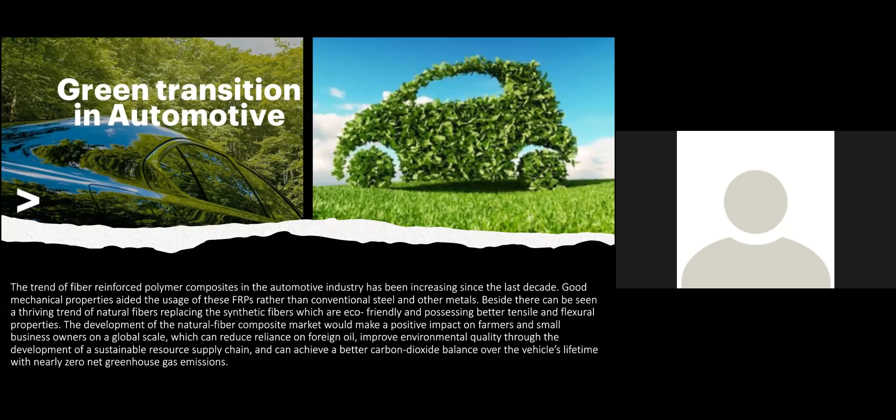You talk about green sustainability transition in automotive. Actually, natural fiber composite cannot be recycled - it's a plastic material mixed with natural fiber. This material cannot be fully recycled compared to steel or aluminium, because you recycle steel and aluminium and get back steel and aluminium. But you cannot recycle this natural fiber composite, and it also cannot be degraded. So how do you ensure that this composite is actually green?

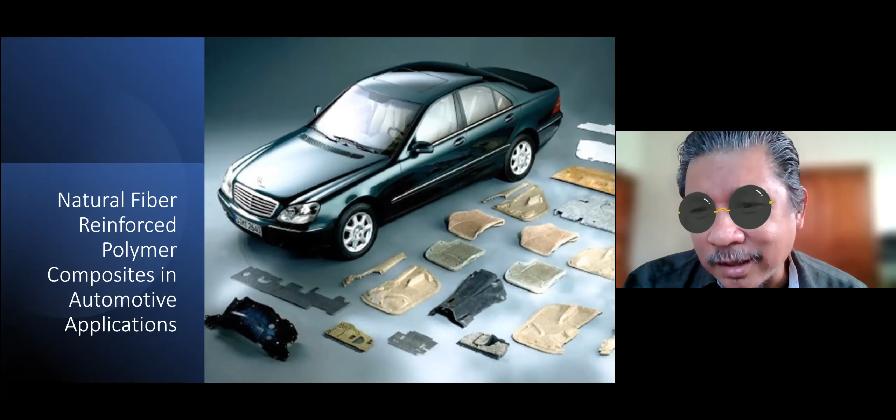I guess you can take it to the recycling center to make toilet paper. Sorry, just a remark. Okay, tak apa, continue. Yeah, so the study also claims that this is good for...

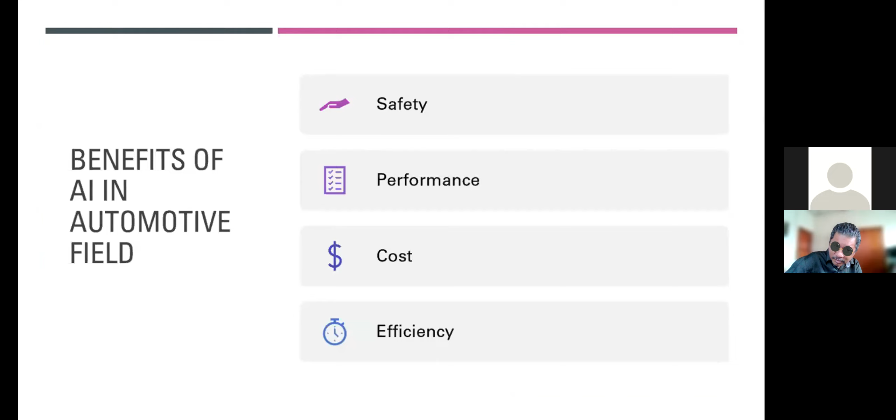Okay, for safety, by using AI in the automotive field or the car itself, the car will analyze data from the database. It will check the driver's behavior and then try to actively avoid accidents.

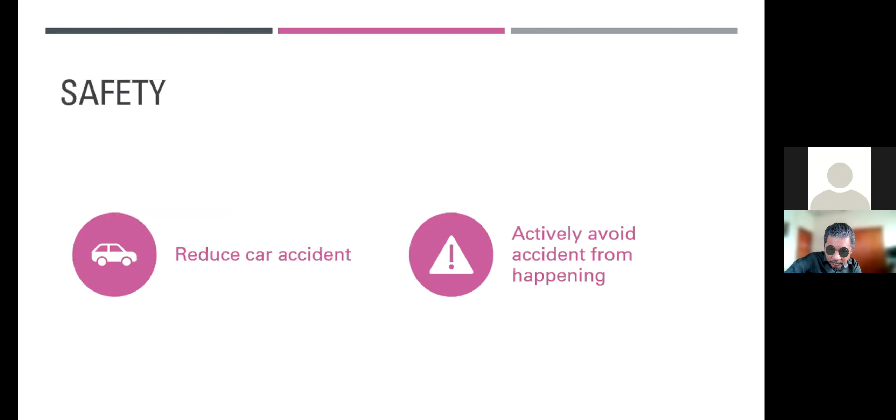So Taiwan is leading. Taiwan is one of the biggest players in electrification of motorcycles. They have a company called Gogoro, one of the pioneers in this market. They have developed a whole system of battery swapping in the region, with stations where batteries can be charged, taken out, and replaced.

There are 370,000 riders in Taiwan using Gogoro's network, 175 million battery swaps a year, 265,000 a day. That's a significant amount of batteries being exchanged across 2,000 Gogoro stations around Taiwan.

Now, this is a good study showing the usability and day-to-day usage of battery swapping technology in everyday life. It's practical, easy, and it seems to work, and we could totally adopt something like this. Now, it's growing fast.

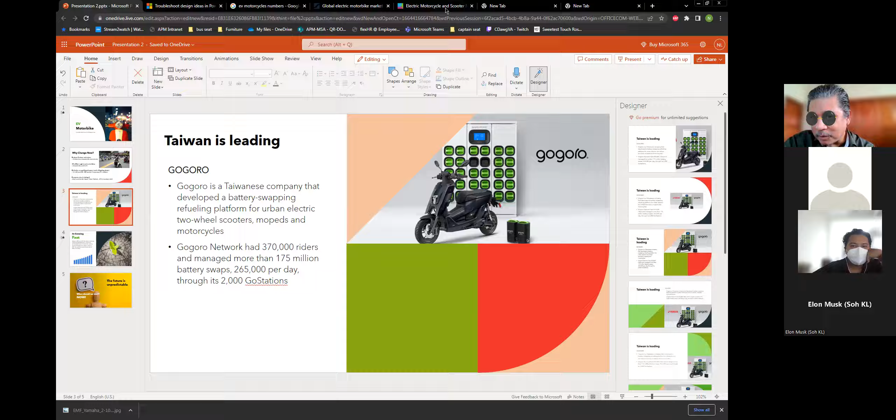So who has not presented? I think we have one more. Do we have another presenter here, or has everybody presented? Kelly, will you be presenting, Kelly? Yeah, I will present now. Okay, I think you are the last one to present. Can I close all the rooms and get you to present in front of everyone? Oh, okay, okay.

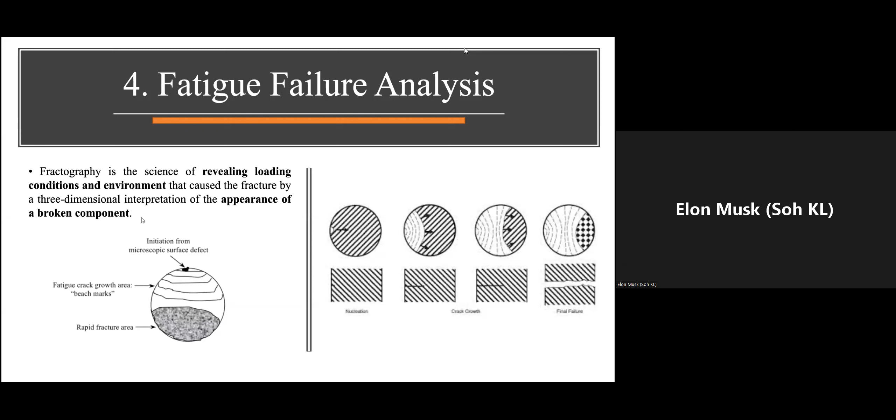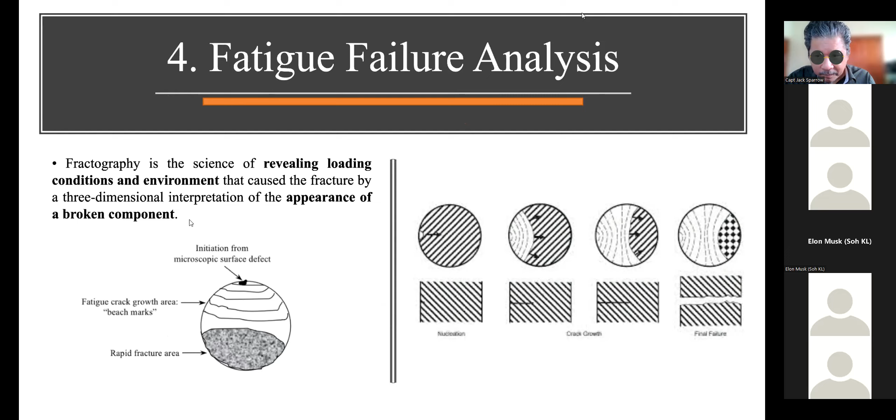There's one method that we use commonly, which is fractography. Fractography is the science of revealing the loading condition and environment that cause the fractures, by a three-dimensional interpretation of the appearance of a broken component, which enables us to read something by looking at the fracture surface, the broken surface of the broken materials.

Because whatever happens on the material, it will leave marks. Different types of loading and different types of stress will cause different types of marks, as you can see on the right hand side, starting with the nucleation.

You will have a small void. As the crack grows, you can see there will be a wave front-like structure mark, propagating from the nucleation spot, the initial spot, towards the opposite end.

As the crack grows, until the point where the connected surface is so small it can no longer withstand the stresses, it will have immediate fracture, which is figure number 4. You can see the diamond shape is the immediate fracture, where it happens within a split second, and the whole material will be broken into two.

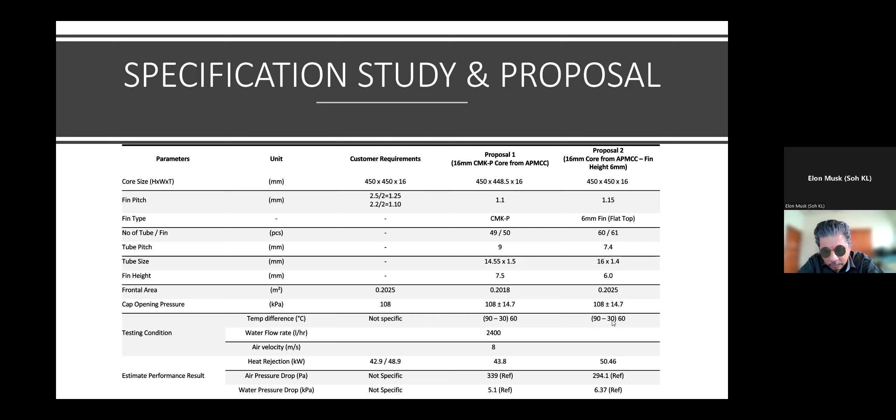Okay, this is a performance study for proposal 1. So for proposal 1, the heat rejection is 43.8 kilowatts compared to customer requirement of 42.9. This is the estimated performance on different water flow rates.

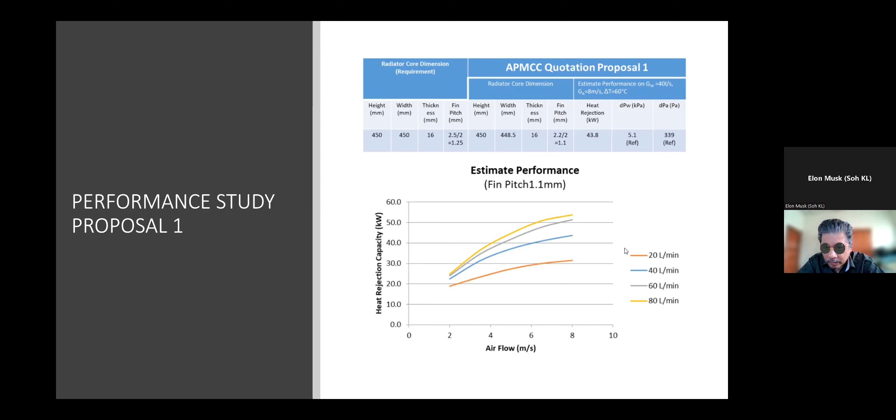And this one is proposal 2 for design number 2, which can produce 50.46 at 40 liters per minute, also 60 liters per minute of flow rate.

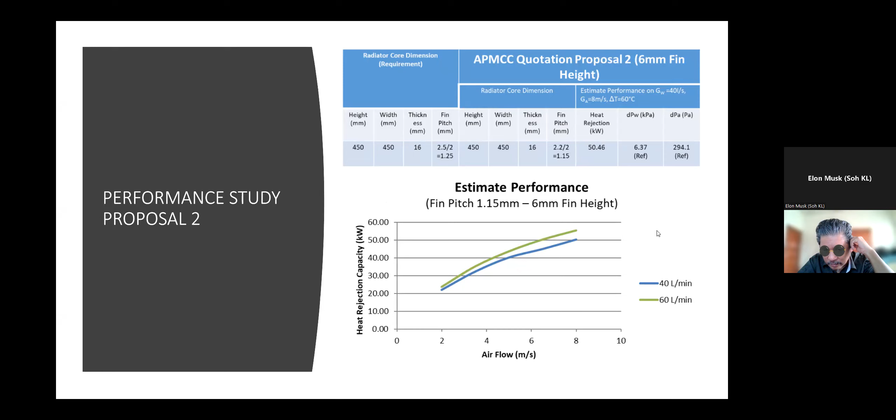Okay, for this radiator proposal for number 1 and number 2, this is a tooling and jig needed to be developed for this project. First one is a tank mold. Second one is the header plate and PRC die, seal pack mold, auxiliary and core jig.

Also, we need some machine modification since we are going to use our 6 mm fin height. So our existing 7.5 mm fin height will need to be modified to 6 mm. And also we are going to develop our new inspection jig. Okay, that's all for this proposal. Therefore, I hope you will consider this proposal to be accepted and approved by your side. Okay, very good.

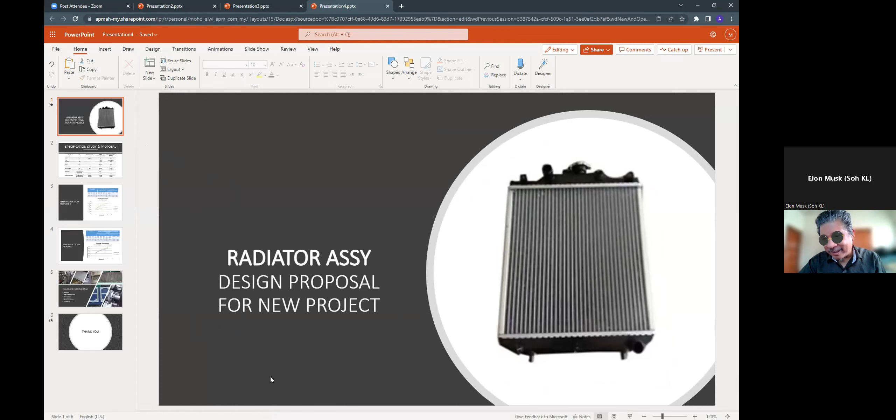Did you mention what problem your proposal is solving at the beginning of your presentation? I stated the customer requirement. Customer requirement, yeah. We don't have a radiator assembly that meets the customer requirement.

So therefore, we have designed, therefore the need for us to design a radiator assembly that meets this requirement. Okay, very good. So proceed, continue with the next one. Okay, thank you, well done.

The concept. So this is how the industrial design team in APM does our design work in general. That's about it, thank you.

It looks like an airline seat. Is it comfortable? Better be, better be. Hey Didi, what problem does your solution solve?

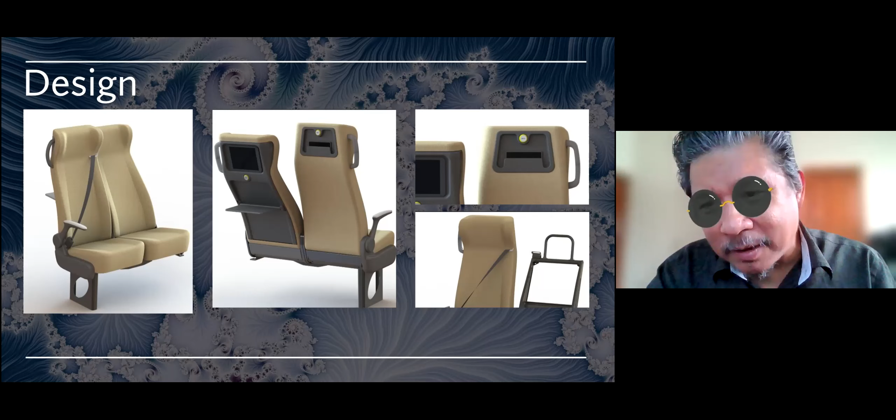Did you identify the problem at the beginning of your presentation, Didi? Oh, so what I'm doing for my presentation today is not to show a product. This is a general showcase of how the design process works in this company.

Design process. Yeah, we showed the general design process in APM, how we start from A to Z basically. Maybe at the end of it, therefore, I hope all of you will use this process when you design items for vehicles, yeah? This ideation process has proven to be superior.

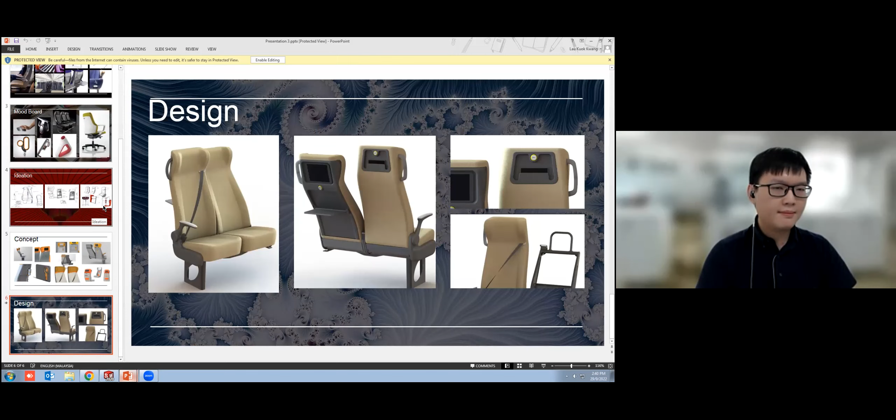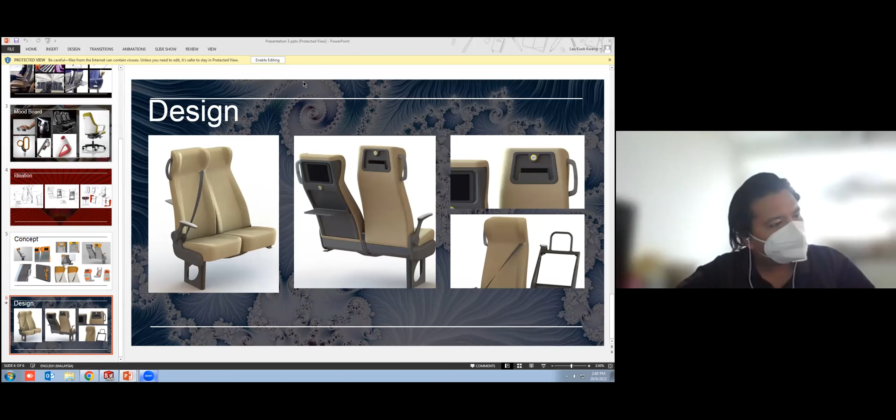Okay, Didi, well done. Next please. Okay, I'll stop this. Next please. John Wick. Okay, I'll come back to you.

Child seat, yeah. So this I'd like to promote too, Captain, child seat. It's a product by APM. We have 2 versions of color, blue and pink. So you can see this product. I didn't know that APM produces child seats.

Yes, where's the outlet, Captain? How do you sell it? Which channel? You just text me, then I get a product for you anytime, anywhere. It's only 288 ringgit, very cheap, you cannot find this so cheap a product in the market. 288 ringgit, and it has ISOFIX, yeah. You have all these features available. Wow, okay, you might be thinking about this. I will take up your offer soon. This is recording, this is recording. Then you can share to your friend, lovely wife, and so on. Well, I like it because it includes ISOFIX, so very good. Okay, well done, all right.

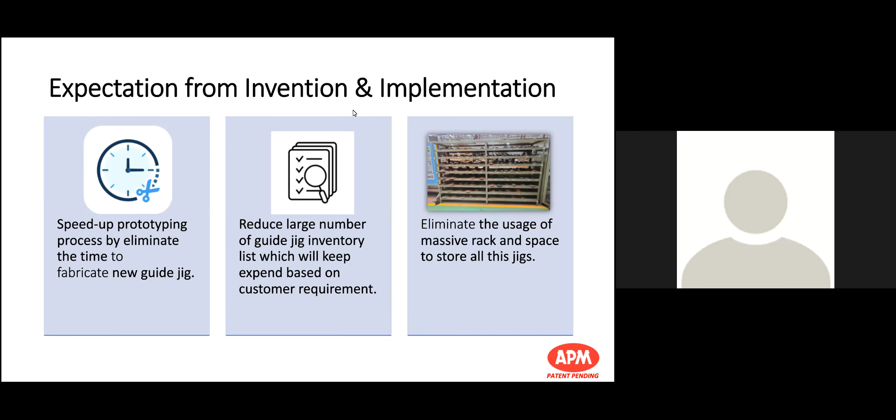And then we also can reduce a large number of guide jig inventory list, which keeps expanding from time to time. As you can see in this picture, the usage of the massive rack, so we can eliminate this kind of method and save a lot of space to store all the conventional jigs. So I strongly recommend and I'm confident that we can meet all these expectations if we proceed with this invention and implement it in our prototype, first print prototype process.

That's all from me, thank you. Okay, thank you Eliud, can you go to your final slide? This one, yes.

So for the first two items, speeding up prototyping and reducing large numbers of guide jigs, you have used vector drawing or line drawing. However, in the third item, eliminating the usage of massive rack and space, you are using real photos. If you use line drawing, keep it consistent. If you use real photos, make sure you use real photos for all the icons. I agree with that, it would look better that way.

Okay Eliud, well done, thank you. Impressive as always, well done. Has everyone finished in this room?

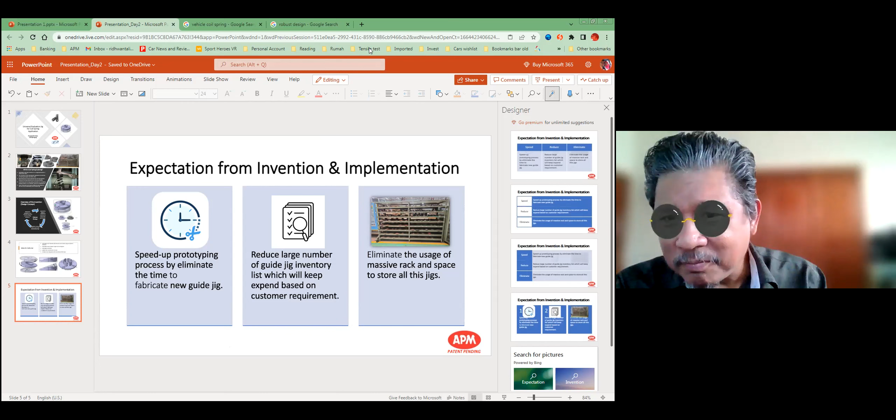Has everyone finished presenting in this room? Yes.

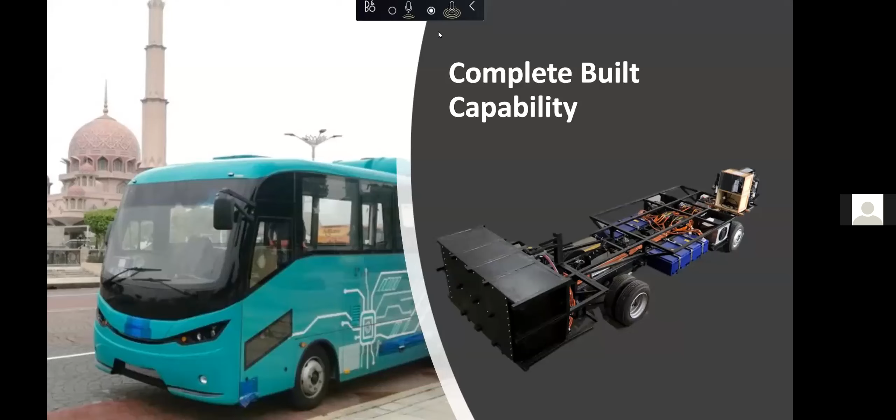So, oh, Master Po is presenting. Continue. Yes I am. So other than complete capability on conceptual design, we are also capable of constructing the full chassis as well as the full body electric bus.

We are also capable in technology development. For example, the heart of the system would be the battery pack. We can assemble the whole battery pack ourselves. We have a lab that is able to assemble and also test the complete battery pack.

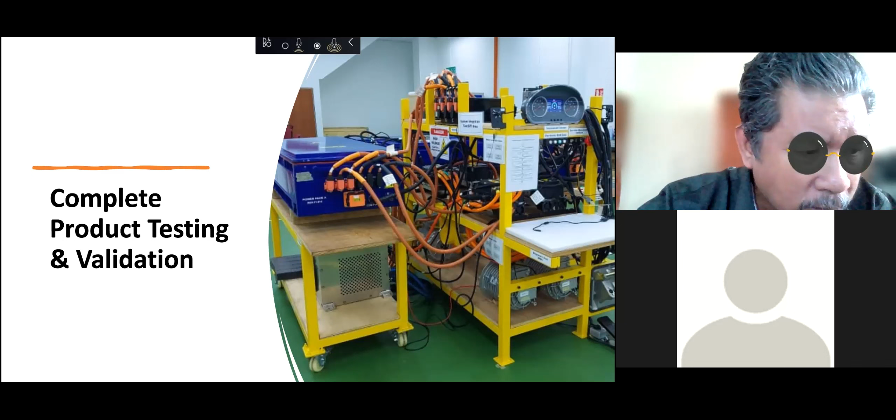We are also able to completely validate the whole system, meaning every component inside the electric vehicle can be tested statically on the bench. So we could demonstrate the protocols and the drive cycle on bench, so that the product we place in the chassis would be easier in terms of validation.

So now we are open for collaboration opportunities in any way possible, including mobility, engineering, data analytics, and sustainability approaches within the company.

For teaching and learning, we are also able to support universities, colleges, anywhere, in terms of constructing dedicated buses for their laboratory applications - what we call a mobile lab. We can also establish EV systems labs to demonstrate the application of components within their lab, and do certain industry outreach in terms of teaching and learning.

The plus factor here is that students who are attracted to this and convinced of it as a future endeavor could be selected to work with us in the future. Thank you very much guys. As a token, I would like to invite all of you to accept the proposal so that we can push for further collaboration. Thank you very much.

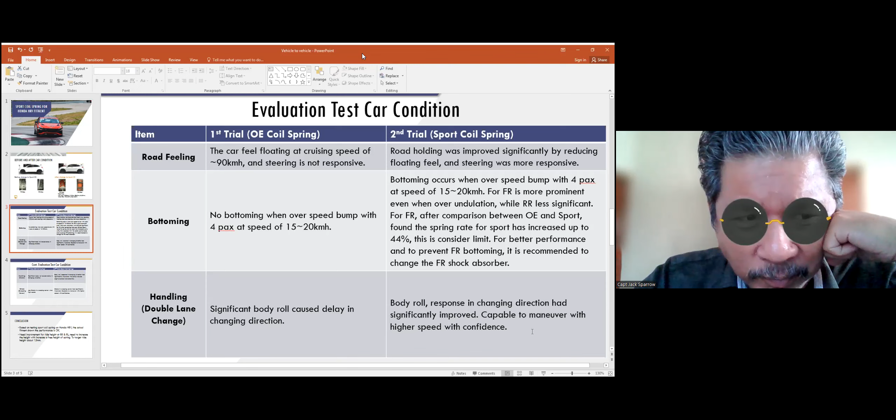Next slide. Okay, so next item is handling slalom.

For OEM, significant body roll causes delay in changing direction. So this one is the same as the previous one, double lane change.

For the second trial, using sport coil spring, the body roll is reduced. In the second trial, when we use the sport coil spring, this problem was reduced. Body roll and inertia have all been reduced already, a lot of improvement over the first trial when we used the OE coil spring.

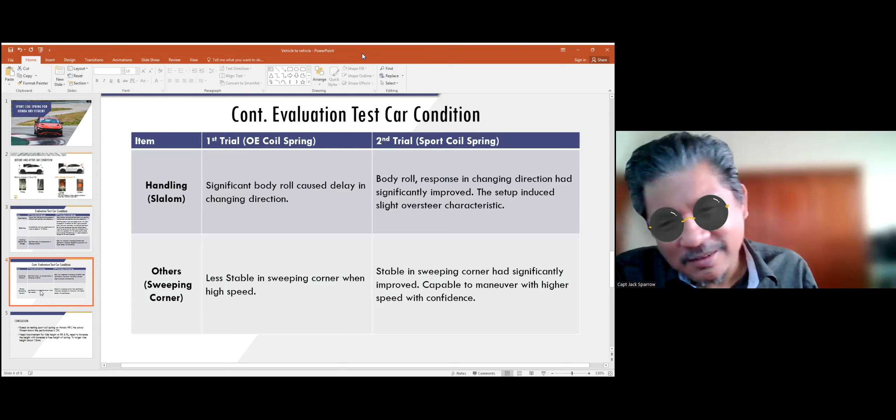So for others, sweeping corner: for OEM, the sweep corner is less stable in sweeping due to high speed.

After we change to sport coil, the stability for sweeping corner has significantly improved, capable to maneuver at higher speed with confidence.

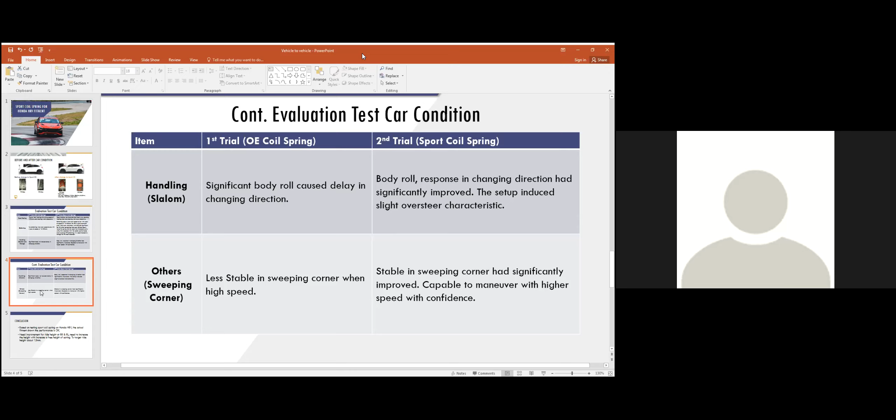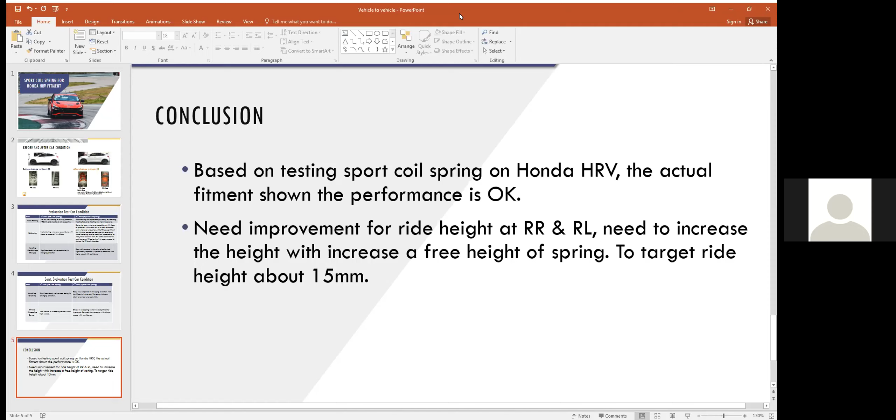What about this? It's a full view or slide. Okay, no, we can't see you. Oh, I cannot see, alright. No. Yeah, share. What about this? Okay. Okay. All right, good.

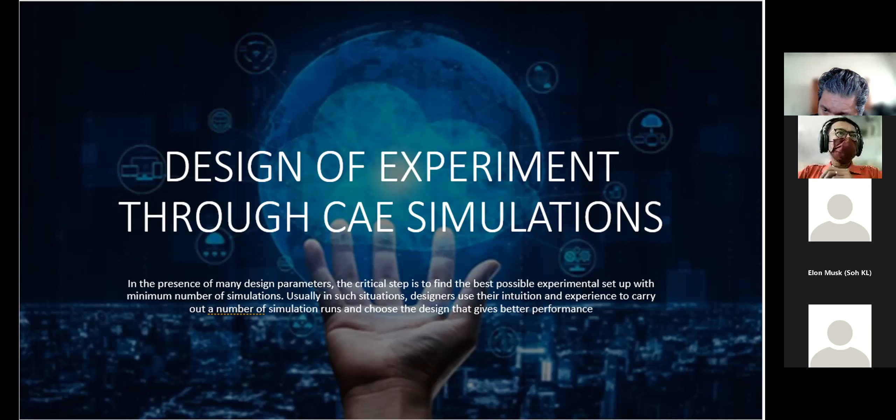So hi everybody, so today what I'm going to present is about a design of experiment, or someone calls it DOE, through CAE simulation. In this presentation we can see many design parameters. A critical step is to find the best possible experimental setup with a minimum number of simulations. In this situation, designers use their intuition.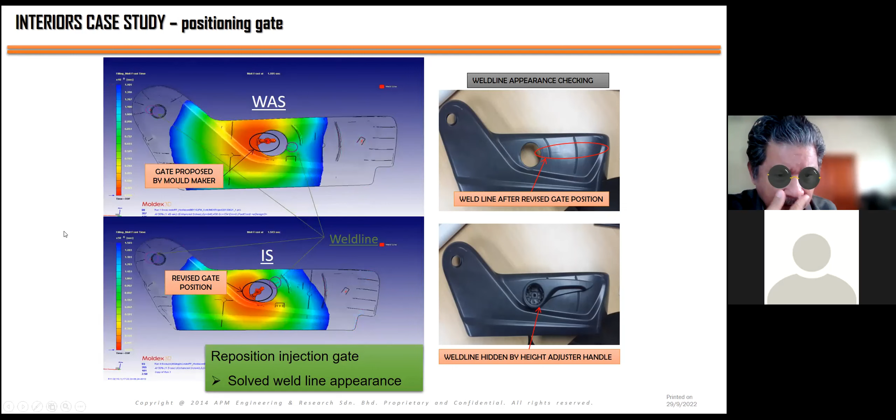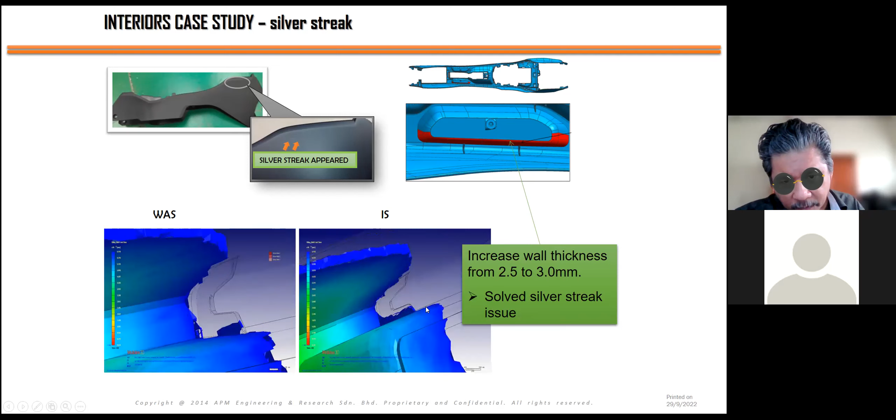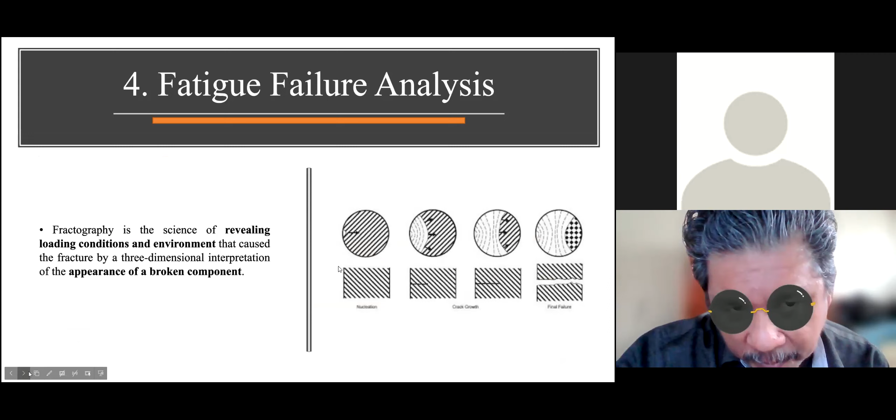Next, we need to identify where and how it travels. To find out how and where it travels, we need to find the stage 2 appearance, which is the beach marks and striations. As you can see in the figure, it looks like wave front lines. It's not as obvious as in the previous slide. For the actual one, it's a lot more tightly packed together.

So moving forward to the last stage, stage 3, which is the fracture zone. This will be shown in surface roughness. As you can see, at the end the whole surface is broken. The fractures will leave the surface with a very irregular and rough contour.

So through this process, we can identify where this crack started. From there, we can further investigate how the crack was made, what causes it, and we can conduct a series of inspection tests on that spot so that we can save a lot of time instead of investigating.

Investigating all the areas. For example, if you want to solve for a sore throat, we would not go and check the leg, check the hand, check the head, check the hair in order to come to a conclusion. If we can identify where we need to check, like I know that you are having a sore throat, I will just go directly into the throat and conduct all the inspection tests we need.

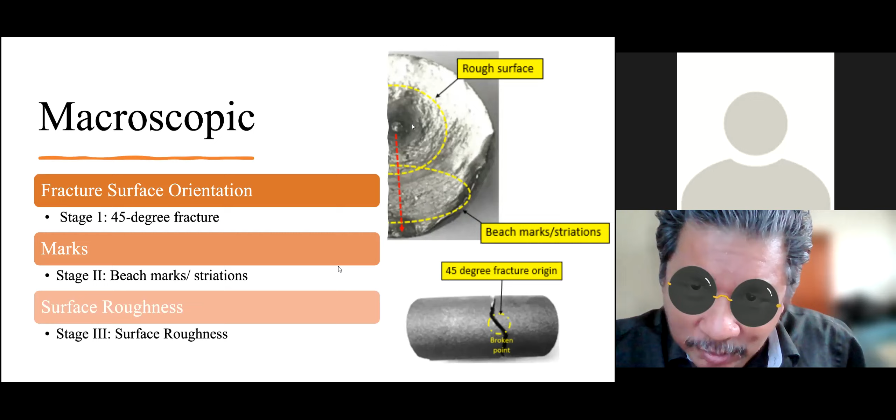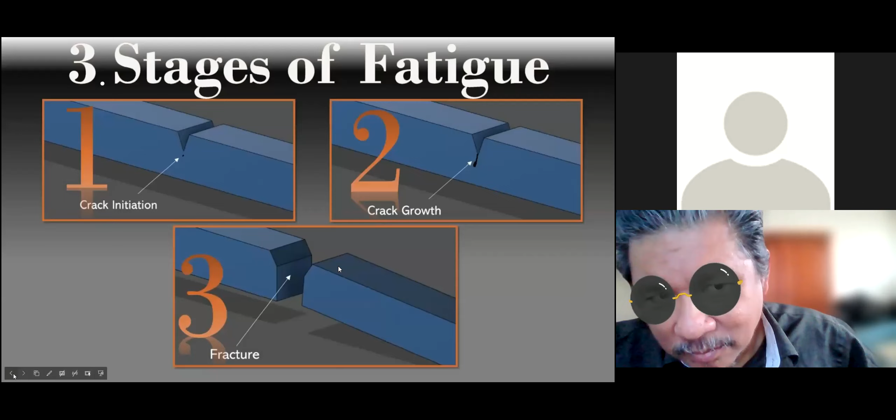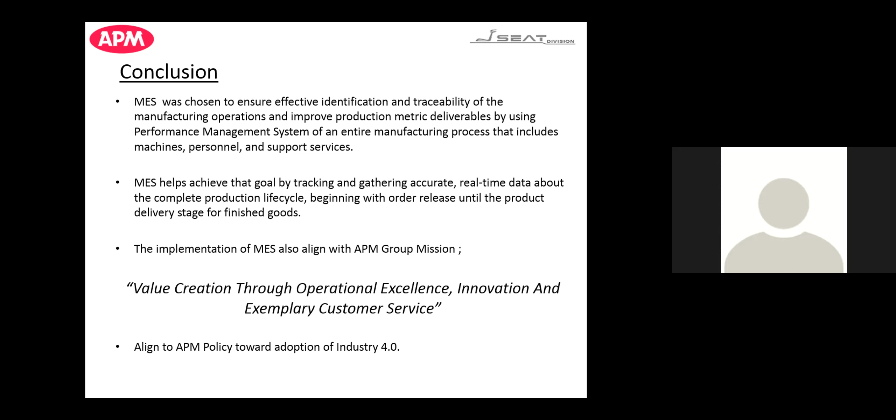My question is, have you implemented MES? Partially, yes, partially. Okay, so is APM aiming for full certification instead of partial? We are working toward that, full, yeah? Okay, not full yet, but we are working toward that aim.

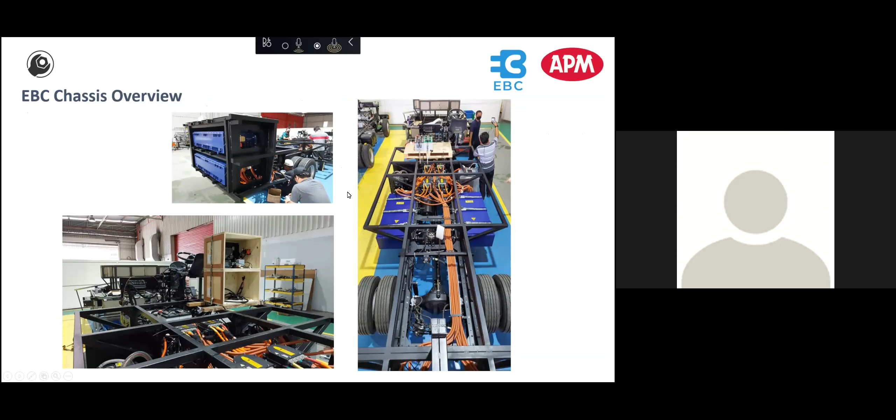In this example, we have two models. The one they are building at the moment is the second model, EBC 0801. They have these VIN codes on the chassis, indicating the meaning of those codes. As an overview, that is the chassis. They have this chassis in front of them and can see all these ready-made chassis. I also presented the location of components so they understand what those things are on the chassis.

For example, battery packs - we have this blue color thing. These are battery packs. The one inside here is also a battery pack. We have 4 packs, and so on.

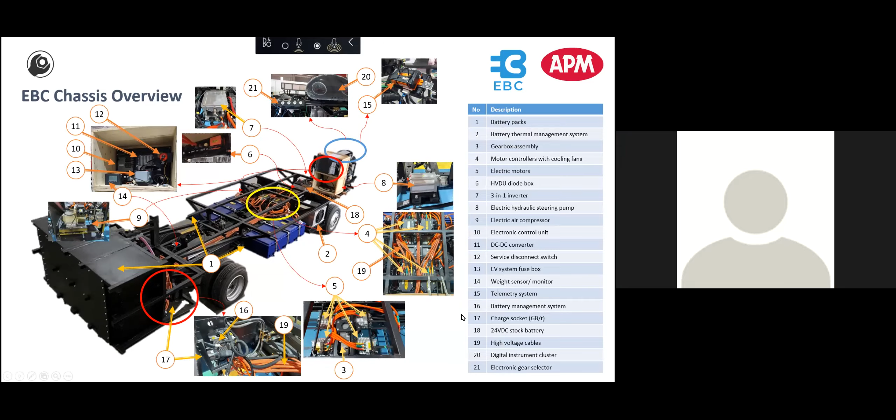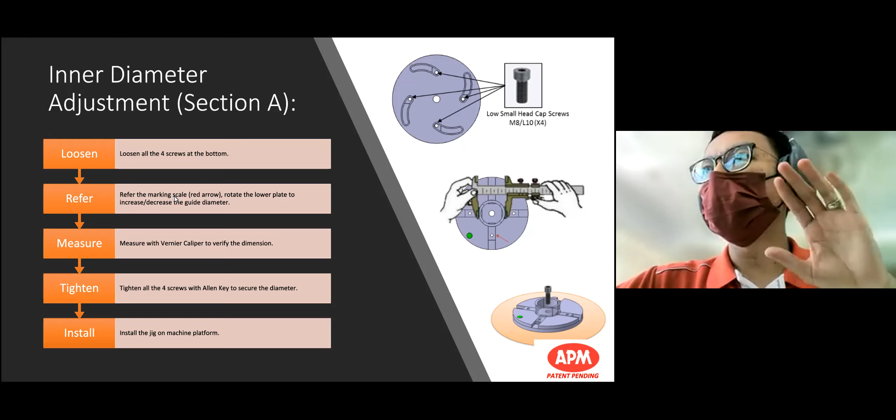On site, we expand the diameter, it will expand and increase. After that, we need to refer to the marking scale arrow, as we can see in the picture. There we have a scale on the jig. After you rotate the plate, you can set how much the inner diameter should be, and then you need to use a vernier caliper to verify the diameter and measure the dimension. After that, you need to tighten all the four screws with the Allen key.

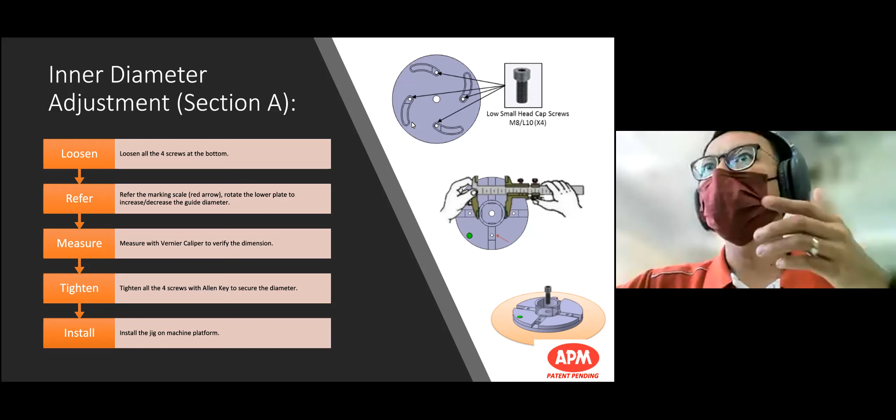And install the jig on the machine platform. This is how it looks when we put it on the machine platform. Okay, next.

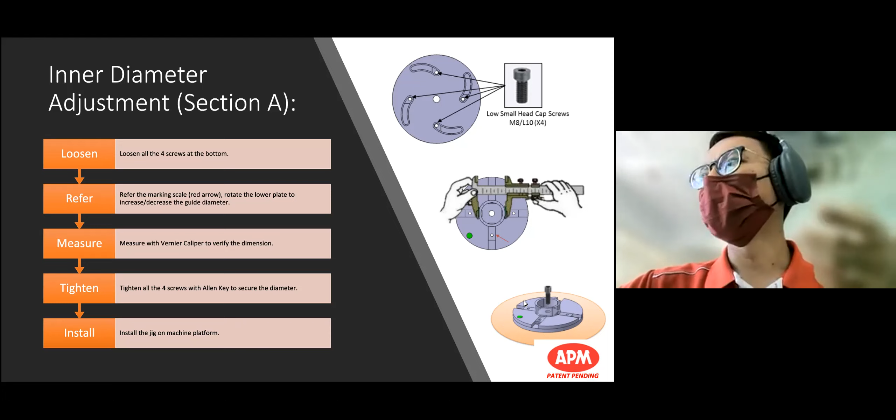Okay, next. Come on, this group. Hello, I'm going next. Can... Okay. Okay, go ahead. Okay, can you see my screen?

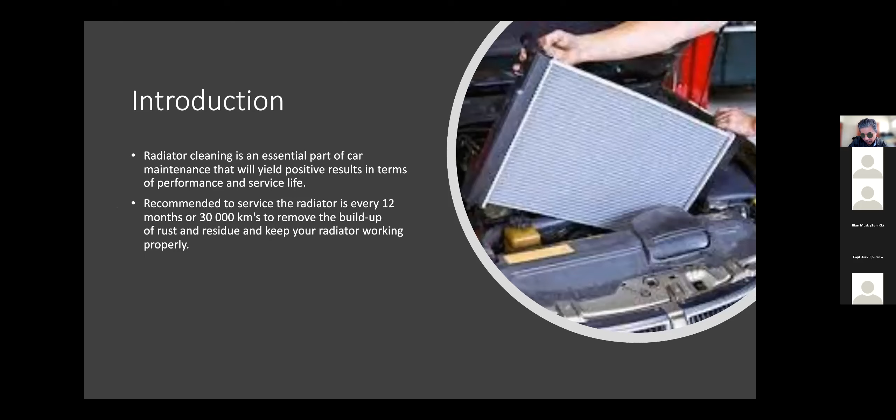So for the introduction, radiator cleaning is an important component for the car to maintain its performance and service life. This radiator is actually an engine cooling part, which can cause a very bad effect if we are not servicing it based on the recommendation. It's recommended to service the radiator every 12 months or 30,000 kilometers. The purpose is to remove all the rust and residue built up by the coolant.

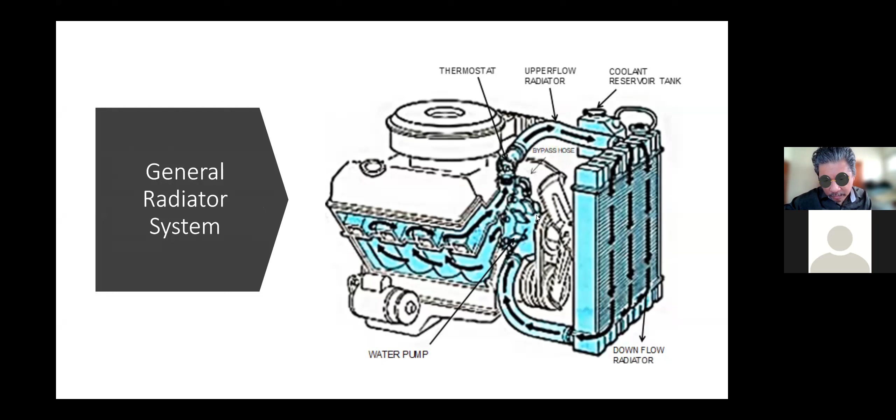So how to service? The service procedure, the first one is the inspection. First, we have to keep our safety to do any servicing job on our car. It's important for us to wear rubber gloves and safety glasses. The purpose is to protect us from the heat and dirty fluids.

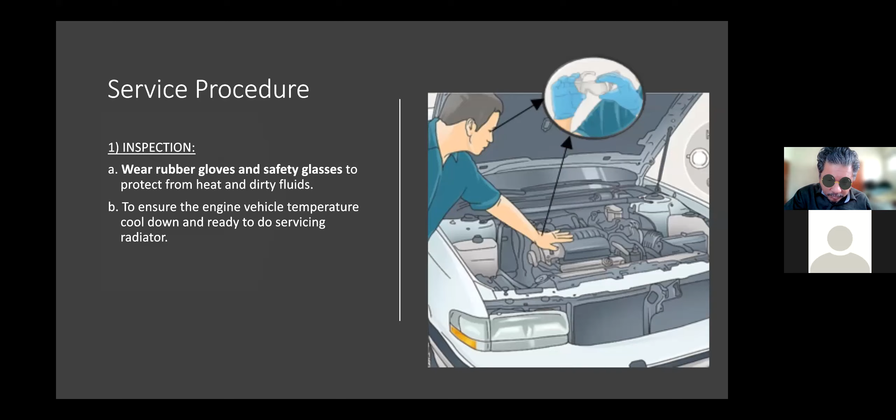Is anyone presenting in this group? Is anyone presenting in this group? Is anyone presenting in this group? Tak ada? Finish. Finish already, finish, okay.

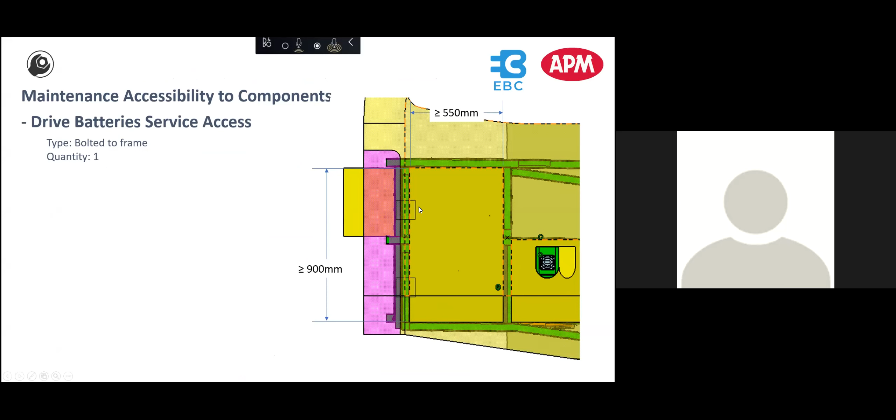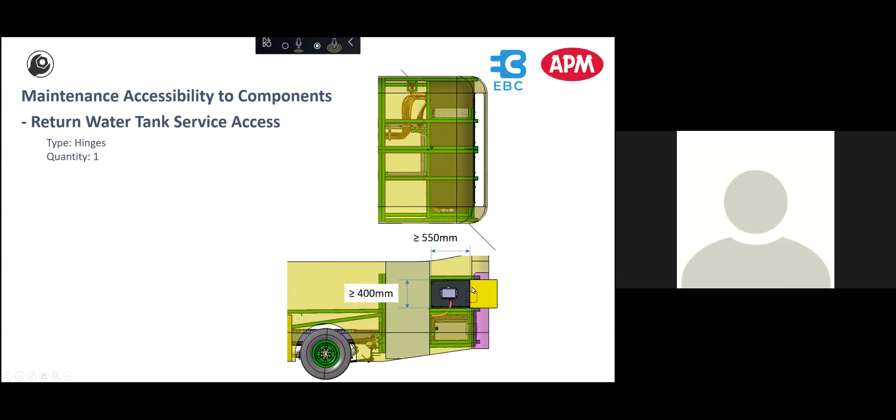So that we access - on the left-hand side, at the rear side, we inform them this is the opening, the height of the opening from ground, right, from the side view, the drive battery access door location. For the water tank, water reservoir location on the left side. The charger plug location.

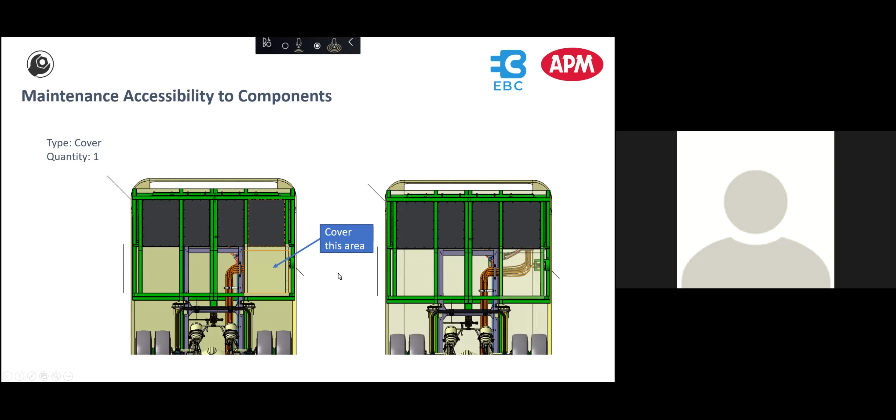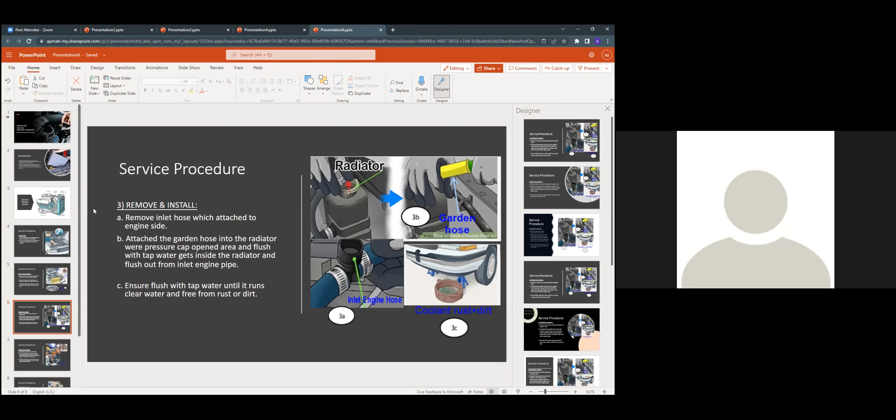Any more questions? How often do you clean your radiator? For the radiator, usually the first one, like I said, yourself. Myself, I think 6 months, because I'm using Saga, so using the old coolant one.

Actually, for radiator it's recommended for us to use the recommended coolant because of the design. I thought the radiator system is a closed system, so do you need to?

No, for radiator we have two types of system, one is closed, the other one is open. What I present to you is an open system one. For the closed system one, it's a bit hard to do at home, we have to get a professional to do it.

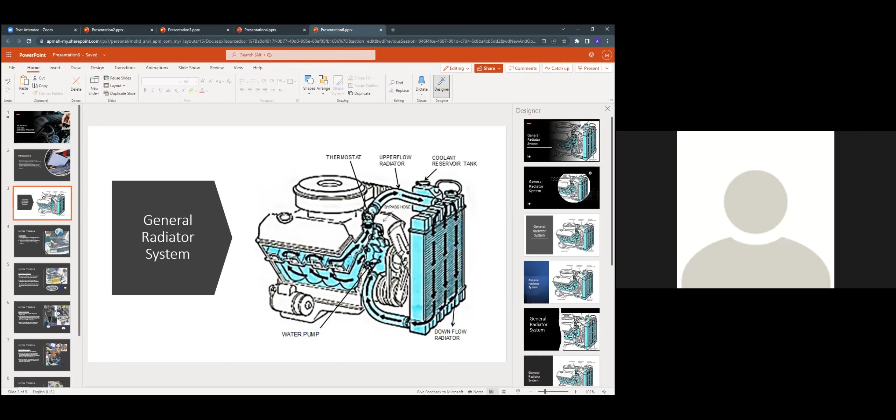Example, what car, what brand? For the closed system, I remember last time it's a Renault Kangoo, the funny looking Renault, similar to a Canary one, like a kangaroo, like a canary. So what's the difference?

Basically, for the closed system one, they don't have this opening pressure cap, and also the drain cock is not located here because this system is closed already. We cannot do anything here. After we put in the coolant, we have to check back the pressure so that it's maintained at a certain pressure.

This is set by the vehicle system. So for this open system one, it's flexible because it's controlled by this pressure cap, which has a spring that controls the pressure of the radiator.

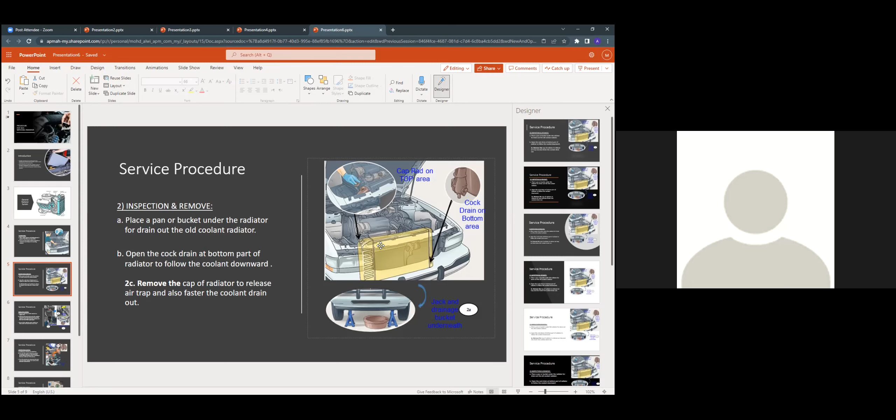So the closed one, I believe is more on Continental, right? Yes, yes. But the Continental also has something like a reservoir to add in.

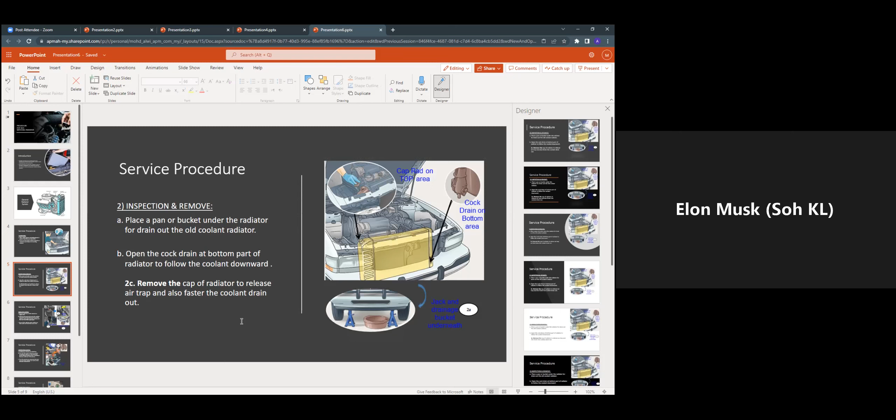So how do you determine the ground area? Not the black one, where do you touch to determine the ground, just a table or any specific spot? Because I'm not an electronic engineer, so I don't know how to use this stuff. Where do you place this to get the ground?

At any electronic component, like the resistor, it has a ground pin or power pin, so we need to check the data sheet. For resistor, I mean if you check, for example a 100 ohm resistor, if you put the two terminals on each side of the resistor, will the multimeter make a beep sound?

This thing is only for the continuity test, so it doesn't matter how much the voltage or current is. If the resistor is okay, it should beep. If the resistor is not okay, it will not sound.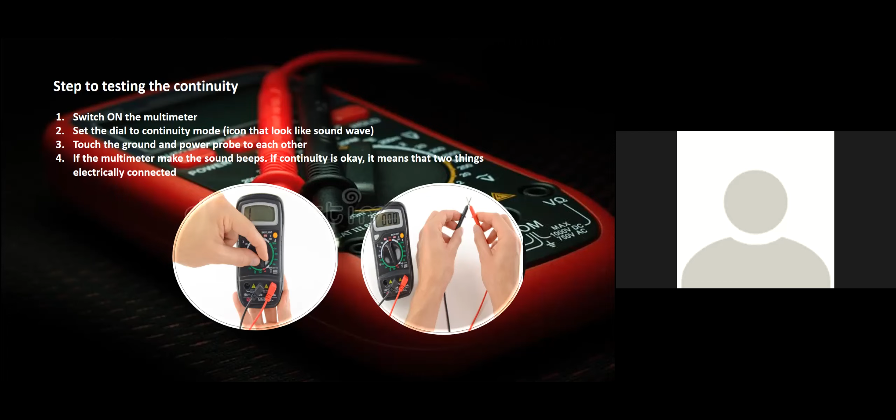I mean like setting to voltage or current. So how much current does it need to be? It's according to your electronic components. For example, a 1 kilo ohm resistor, how much current?

Has everybody in this group finished? This group finished?

So the new method I'm using now, I can use the shortcut key. If you test now, you can press shift window and S, it's a screenshot. Then you can screenshot any area that you want. After you do the screenshot, you just paste it to the document. For me this is way faster, within 1 second I can do all the screenshots, so if anyone does a lot of screenshots, try pasting into your document.

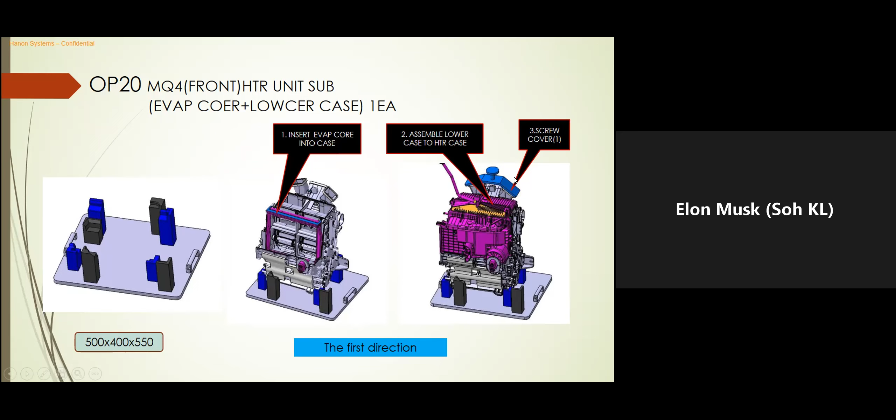So first of all, we need the ultrasonic fuel sensor, and then we need the epoxy glue, sandpaper, and also the measuring tape.

So the next step, first we have to attach the fuel sensor to the fuel tank. What's important is we have to use the measuring tape to find the center point at the bottom of the fuel tank. Once we have located where that center point is, then we clean that area with the sandpaper.

Make sure that it's clean, there's no dirt, no rust there. Then we mix the epoxy glue together and apply this mixture to the fuel sensor. Once applied, we attach it at the center point of the fuel tank, and we hold it for a few minutes until it hardens. Once it hardens, we check that it will remain fixed there.

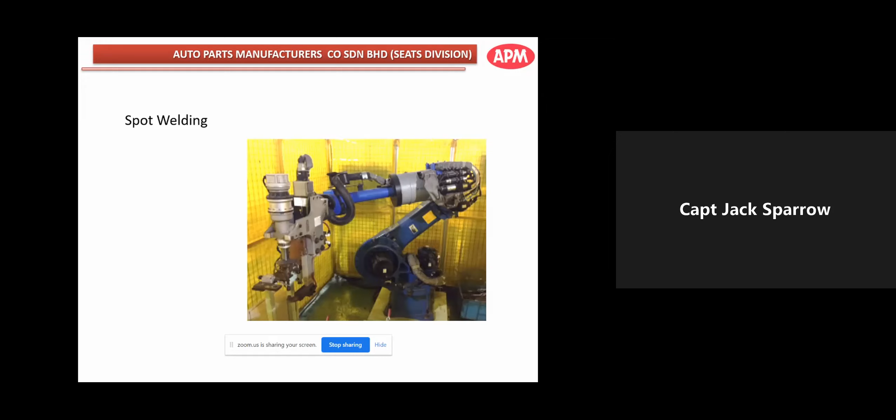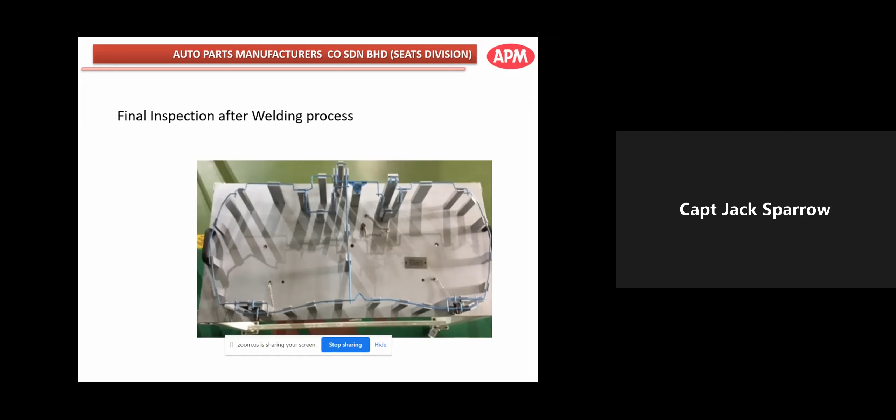After the welding process, the finished product will be passed to the final QC area for final inspection. The photo shown is the final checking fixture. If QC confirms the product is okay, then the product will be passed to the packer. The next photo shows the delivery trolley. The packer will arrange the product based on the packaging standard agreed with our customer.

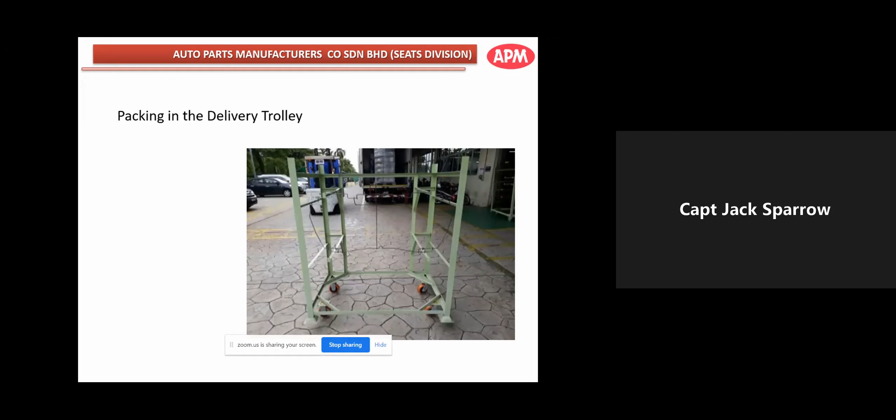After packing is completed, the trolley will be delivered based on the Kanban or coin plan. So from here, I end my presentation. This is the general flow, regardless of the model, so the process flow is actually the same regardless of the model involved for this item. Do you have any questions?

Nope. Okay, are you the last presenter in this group? Yes. Okay, hang on, hang on. Okay.

To hold the two components together. So this is the whole piece of the front HVAC that we already assembled, and then this thing will be installed in your car dashboard, behind your dashboard for your air conditioning purpose. So thank you.

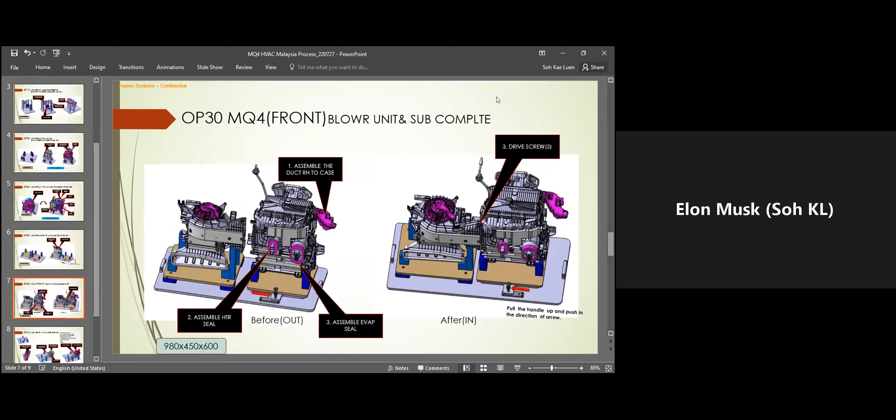Question? Okay, thank you. Are you the final presenter in this group? Yeah, you're the final presenter. Okay, hang on. Let me check group 2.

Drilling, we use the epoxy glue. Sorry, again, we use the epoxy glue. So we have to clean the bottom surface first, and then we mix the epoxy glue.

But the sensor, how do you put it in? It just attaches to the bottom surface. Or is it attached to the external of the tank? Or is it something like a strain gauge?

Okay, has this group finished? Has this group finished? Yes, yes. Okay, there's one more group who is still presenting. Hang on, yeah, group 2 is still presenting. Hang on.

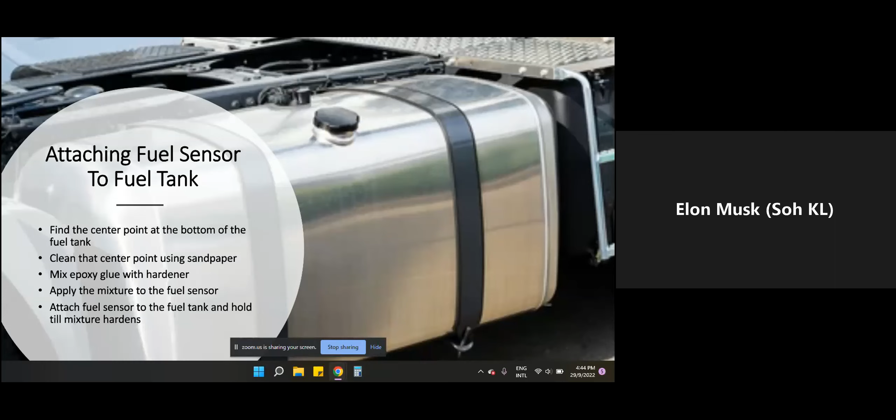Cannot so easily read the CAN bus, yeah, so a few reasons. So why most of the drivers attach this is more because they want to see remotely what is the fuel reading. But let's say if you want to use the sensor that is already on the vehicle, you need to go through the CAN bus and the data to get that reading, which manufacturers usually don't share very freely. Not easy to break the thing.

Okay, are you the last presenter, Fahmi? Yes, this group? Okay, finished? Yeah, finished already. Therefore?

I hope my simple presentation shed some light on how we fix the fuel sensor to our trucks, to our customers' trucks.

Sorry, Fahmi, your ultrasonic sensor can only sense on metal, or if let's say it's something like now they have a fiber tank? That one I'm not so sure, have to check back. Because previously we mostly did trucks using the metal tank. Yeah, metal, yeah. Maybe this one needs to explore a bit more. Yeah, now it's very common with the fiber one actually. But okay, most trucks and lorries use a metal tank, right? Yeah, most now, yeah.